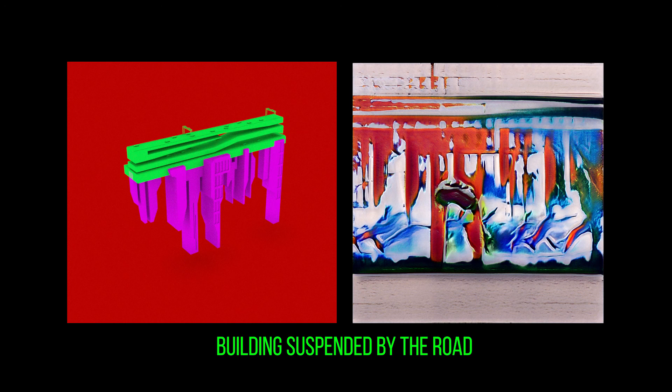Then I want to extract the results systematically and categorize them to produce the master plan of the city. Here are 8 categories I summed up from the result. The purple represents architecture features, and the green represents the transportation features.

The features I'm mainly looking at are the relationship between the transportation system and the building aspect, which is a fundamental formation of a city. By going through the process like extracting the 3D geometry from 2D images, the geometry logic is being re-understood and reformed, as you can see here.

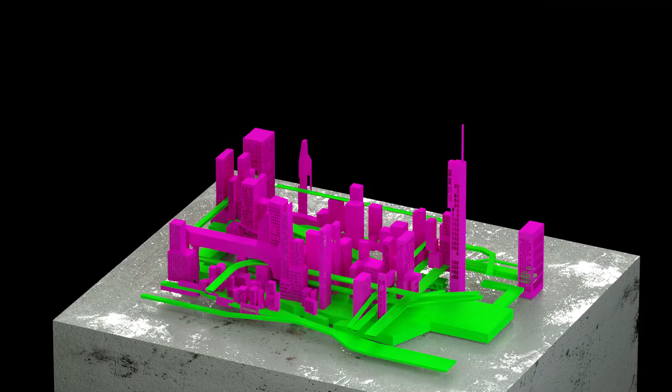Then I reorganize these elements. By doing this, the city exposes those organizational features and uses them to reconstruct the ideal futuristic city.

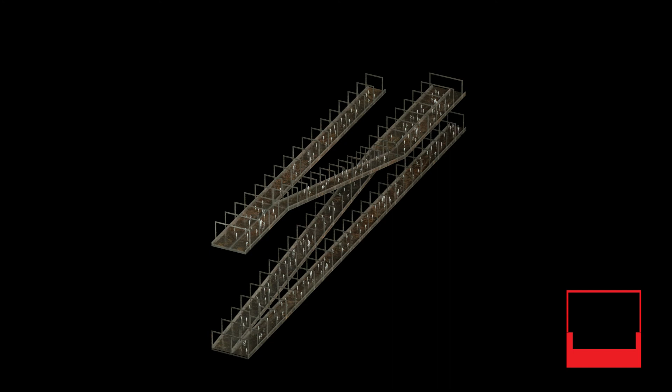I identify the transportation system into 4 main kinds and design them through sections to show different ways people occupy the city. The first one is a railed train system. The second one is a road for vehicles. The third one is a walkway for pedestrians. And the fourth one is for the auto delivery system.

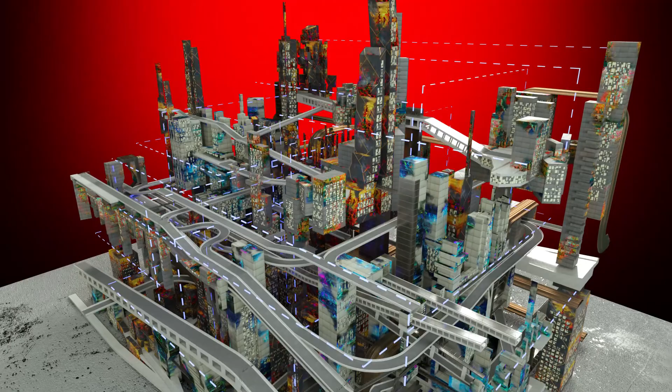The system adds complexity and logical understanding when the cities start to form and stack on top of each other. By approaching a realistic urban design based purely on organizational relationships among urban elements, a new form of futurism starts to establish. It is a combination of a common aesthetic value plus the AI interpretation plus a new organization.

The next step is to develop the project on a close-up human scale that can expand the life experience. The building design was established by analyzing a series of infrastructure's consequences.

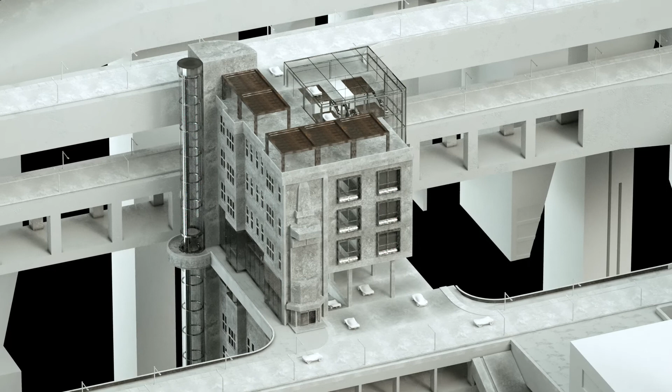The first example is a connection that solves the height difference between 2 bridging roads. This car elevator featured in the middle of the apartment complex resulted in an interesting phenomenon that the transportation system and the building are united as a symbiosis. In this way, the apartment is facing the city no matter what direction.

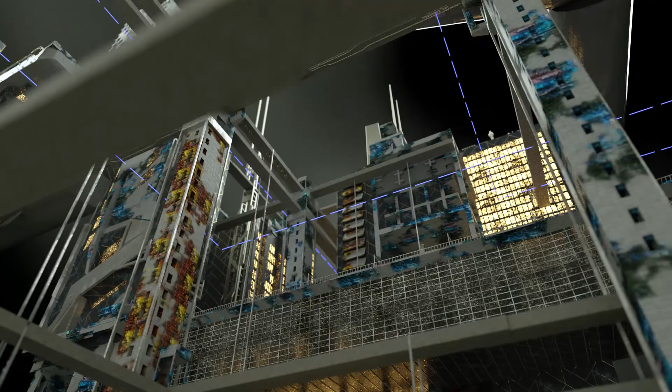The second vignette is a close-up city block that reveals how many different transportation systems are supporting each other on all levels, and how many different ways people are occupying this city. Besides directions like north and south, there are also up and down.

The third moment shows how a variety of disproportionate and slim buildings are connecting to each other, and what it feels like to actually live here. These kinds of formations will of course have architectural consequences that differ from our own city experience.